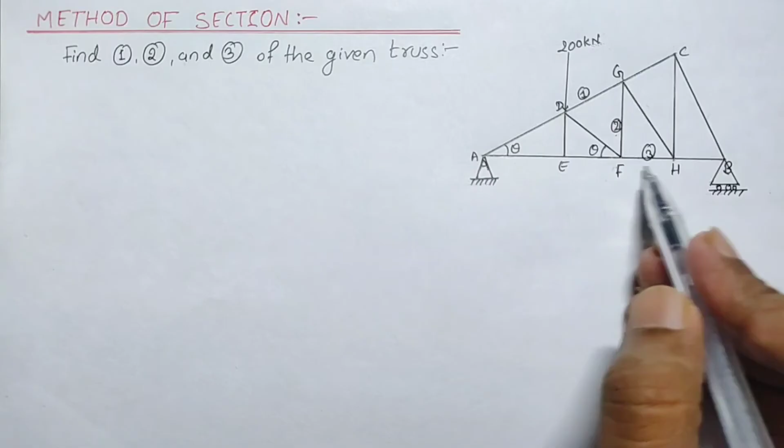We use method of section when some specific members of a truss are asked to find the forces in it. That means when the question is to find the forces in some specific members, not in all the members but some specific member, in that case we use the method of section.

There are some steps which we will be following to calculate the forces in these members DG, GF and FH. Before beginning the video, let us have a look at the steps which we will be following in this numerical.

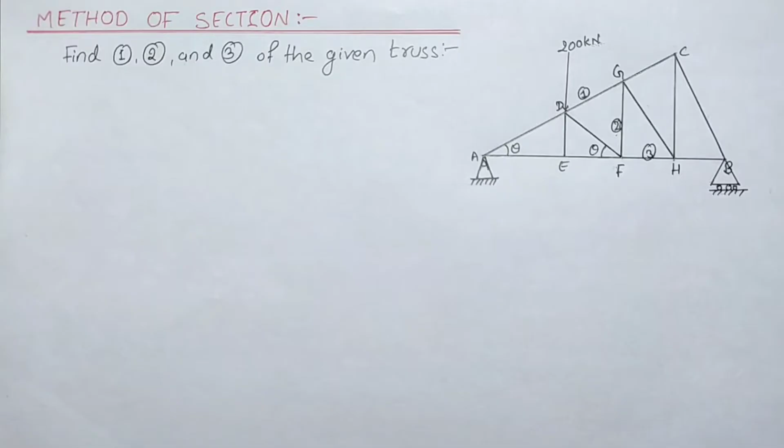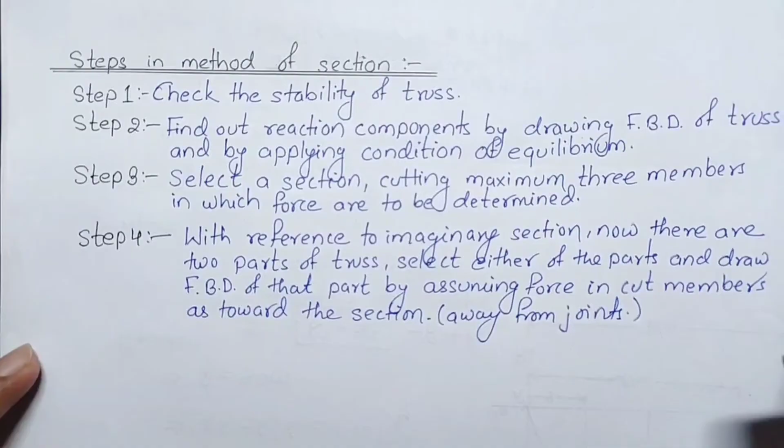So guys, here are the steps which I will be following in this numerical or in this video to calculate the unknown forces which we are asked.

Step 1 is check the stability of the truss. In step 1 I will be applying the condition for checking the stability of the given truss, that is m equals to 2j minus r.

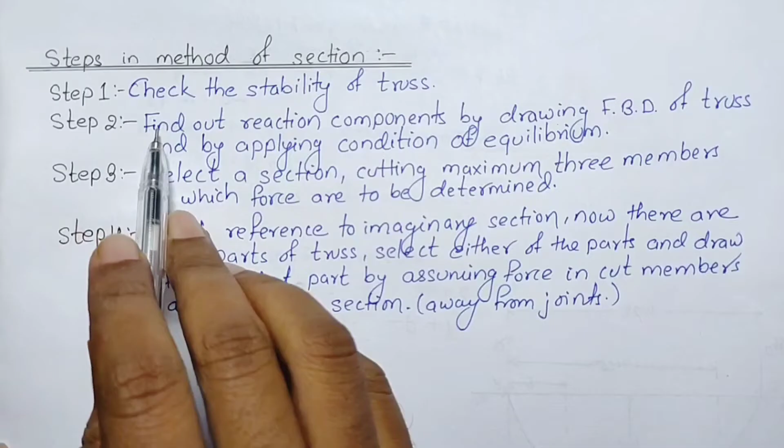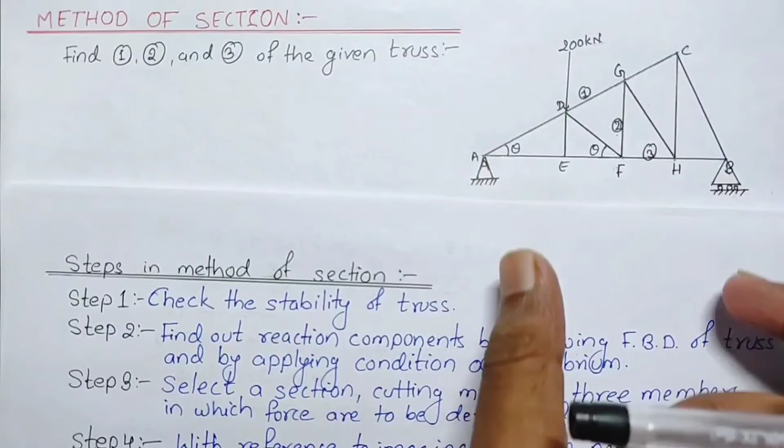Step 2 we need to find out the reaction component by drawing the free body diagram of the truss and by applying the condition of equilibrium. I will be drawing the free body diagram of this given truss below this, and then I will find the reaction components, that is calculating the reaction at support A and B in step 2.

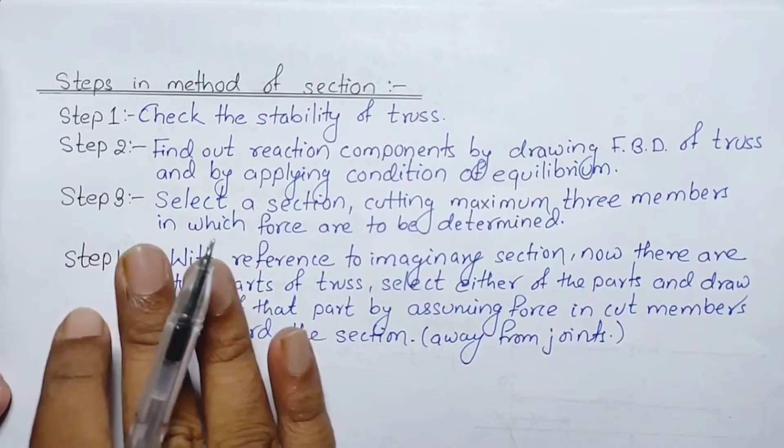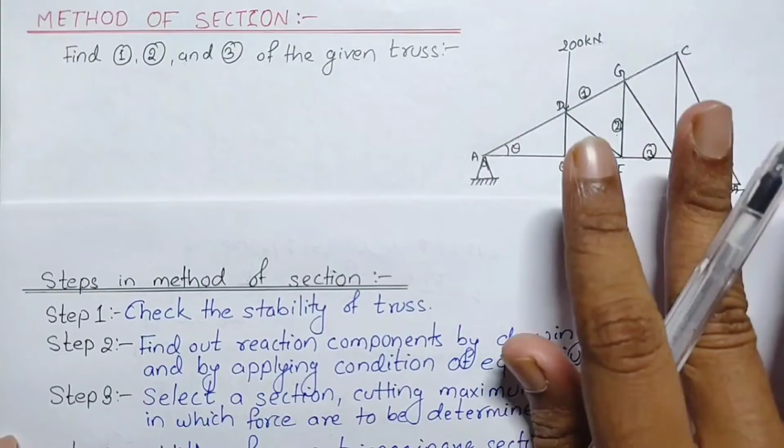In step 3 what we need to do is select a section cutting maximum 3 members in which forces are to be determined. It is saying that we need to split this whole truss into 2 sections, and the line which splits this truss into 2 portions should cut only a maximum of 3 members of the truss.

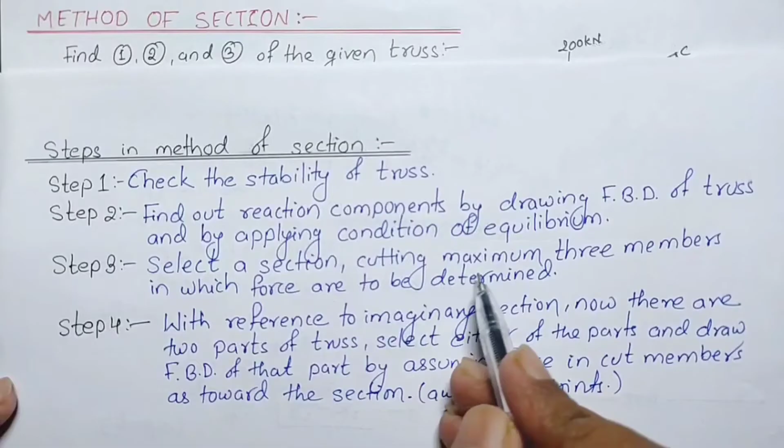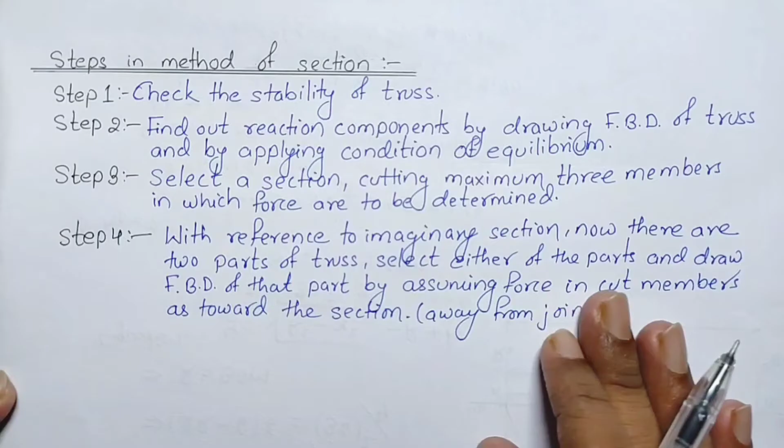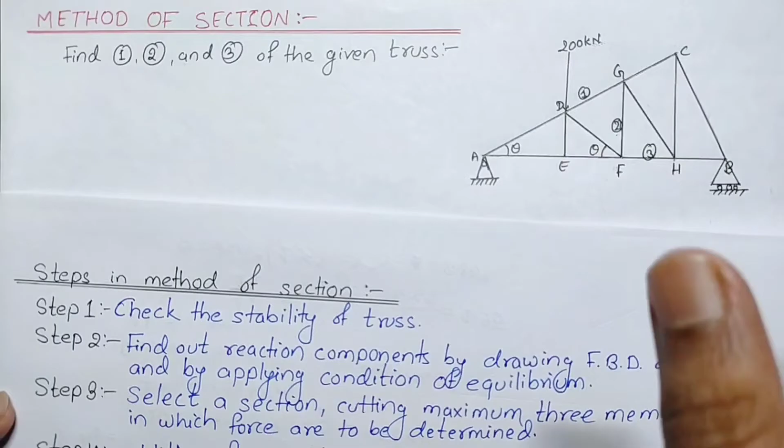Step 4 is, with reference to the imaginary section, there are now 2 parts of the truss. Select either of the parts and draw free body diagram of the part by assuming force in the cut members. After dividing the truss into 2 sections, we need to select either of the imaginary parts, because the truss is now divided into 2 parts, so we can use any of those 2 sections, and using that section we will be finding the unknown forces.

So guys, without any further delay, let's move toward step 1. Here is step 1, and in step 1 we will be checking the stability of the truss.

For checking the stability of the truss, we need to calculate the number of joints, number of reactions, as well as the number of members in this truss.

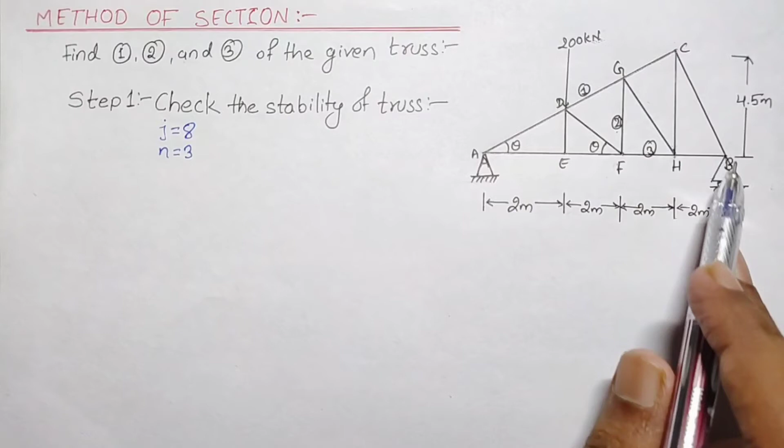Let us calculate the number of joints: 1, 2, 3, 4, 5, 6, 7, 8. So I have denoted the number of joints equals to j, and j is equal to 8.

Now we need to know the number of reactions. Suppose the support A here is our hinge support, and the number of reactions will be horizontal and vertical reaction, while moment is released here. Let us denote the reaction by R, and here the number of reactions is 2 due to the hinge support.

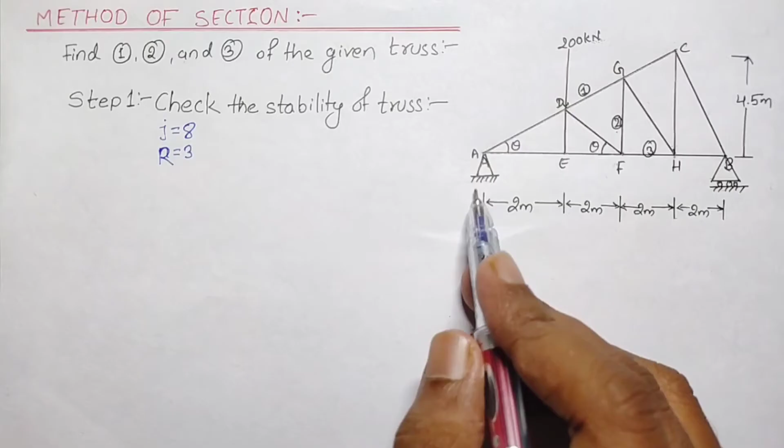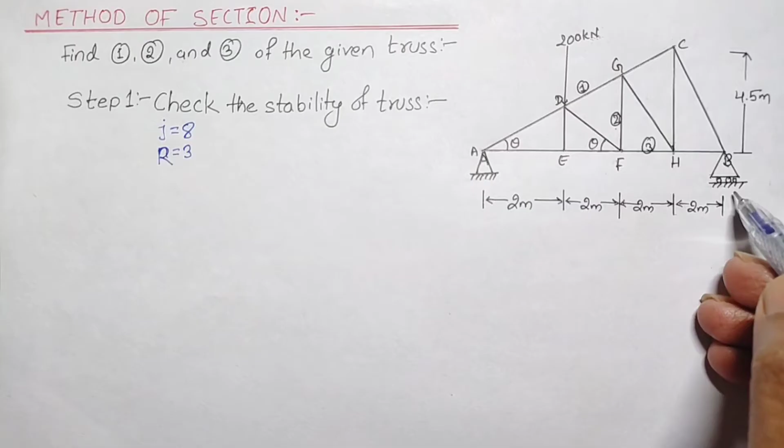Due to the roller support here we will have only 1 reaction, because the moment and the horizontal reaction, or horizontal force, is released. Here it will be carrying only vertical force, so the number of reactions will be equal to 3.

Let us note the number of members will be equal to n, and let us calculate the number of members of this truss. The members are 1, 2, 3, 4, 5, 6, 7, 8, 9, 10, 11, 12 and 13. So n will be equal to 13.

Now we have a condition, that is n equals to 2j minus r. If we put the value of j, which is equal to 8, minus reaction equal to 3, then we will have 16 minus 3 equals to 13, which is equal to n. So the truss is perfect.

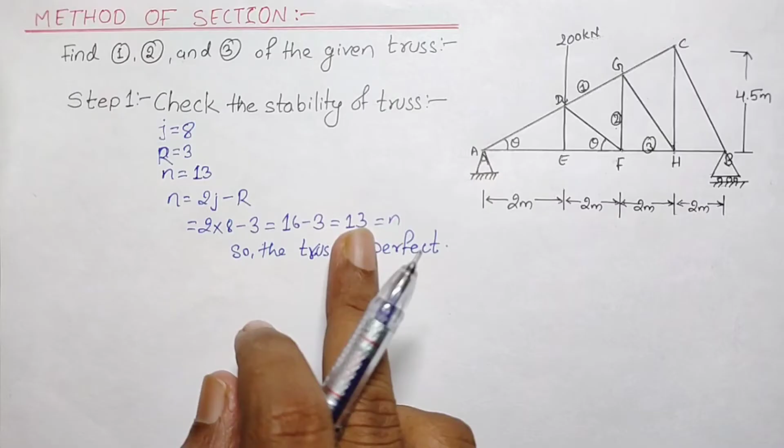So guys, we have calculated that 2j minus r is equal to 13, which is equal to our number of members. If this condition satisfies, it means our truss is a stable truss or perfect truss.

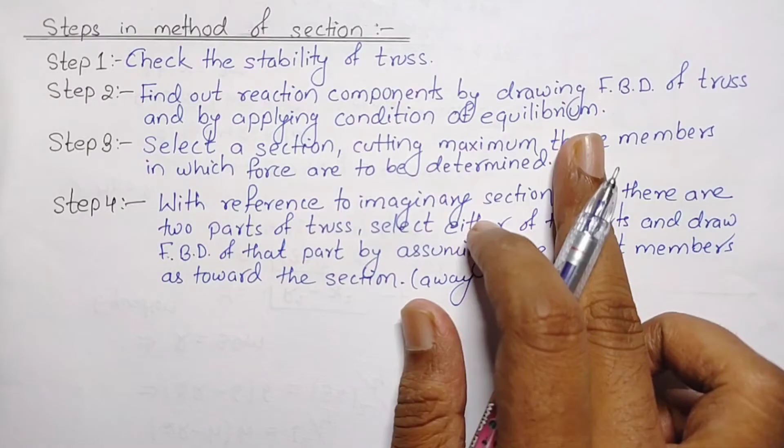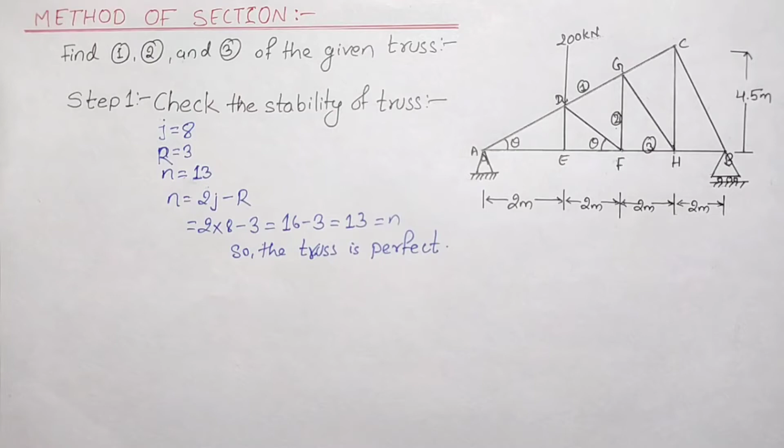Now the second step is to find out the reaction components by drawing the free body diagram of the truss and applying the condition of equilibrium. So in this step I will be calculating the reactions, but before that there are some unknowns which we need to calculate first.

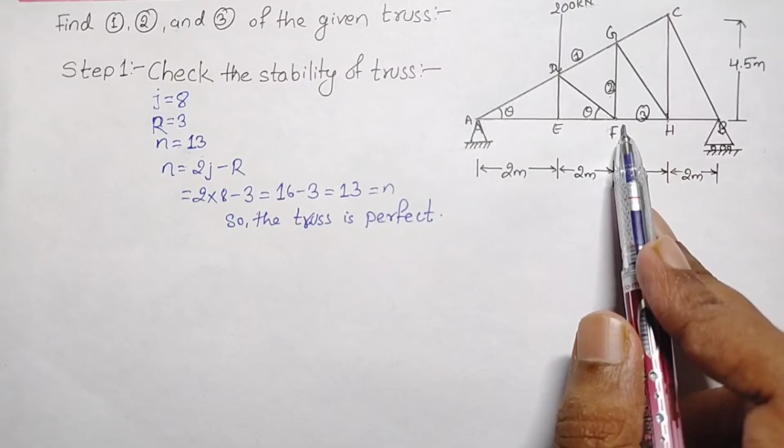Let us find out the unknowns first, and the unknowns are theta. We need to calculate the value of theta, and we will be needing the value of span GF. We have the value of span CH equal to 4.5, and we don't know the value of span GF, because it will be helpful while calculating the moment related to different points while calculating the final forces. So let us find those unknowns first.

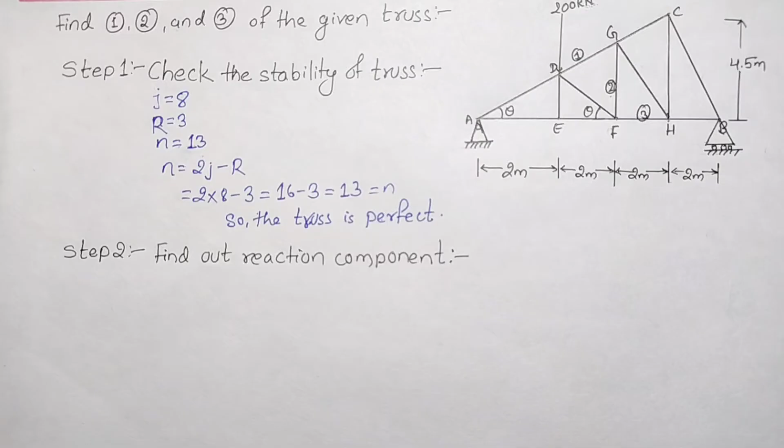So guys, here is step 2 in which we will be calculating the reaction component, and before that let us find the unknowns, that is span of GF and theta. First let us find the unknown span of CH.

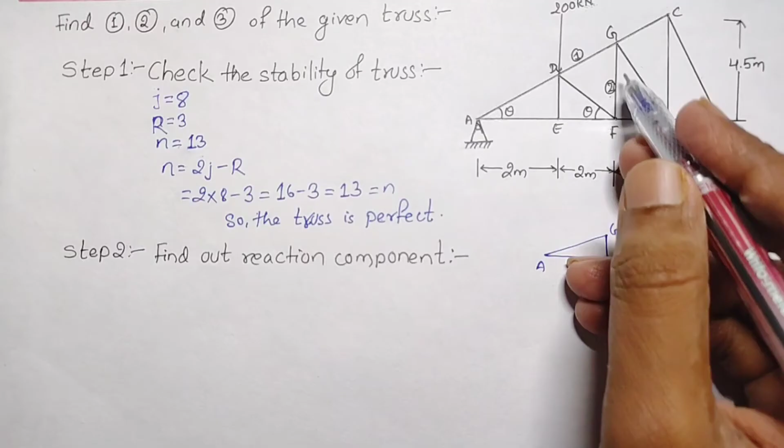Let us draw a triangle AFG and this big triangle AHC. Now guys, in triangle AFG we have the span from A to F equal to 4 meter, and span of AH is 2 plus 2 plus 2, meaning 6 meter, and we are calculating the value of FG, which is unknown, while we know the value of CH which is equal to 4.5 meter.

It says that the corresponding sides of similar triangles are proportional. So if I take X, Y, and the corresponding side of this triangle, side FG is proportional to CH, so X upon 4.5 will be equal to 4 by 6.

What I did here is just apply the condition of similar triangles, which says the sides of similar triangles are proportional, meaning X is proportional to 4.5, and 4 is proportional to 6. Now from here we can calculate X equals to 4 times 4.5 divided by 6 — just cross multiplication — and on solving this we get the value of X equal to 3 meter.

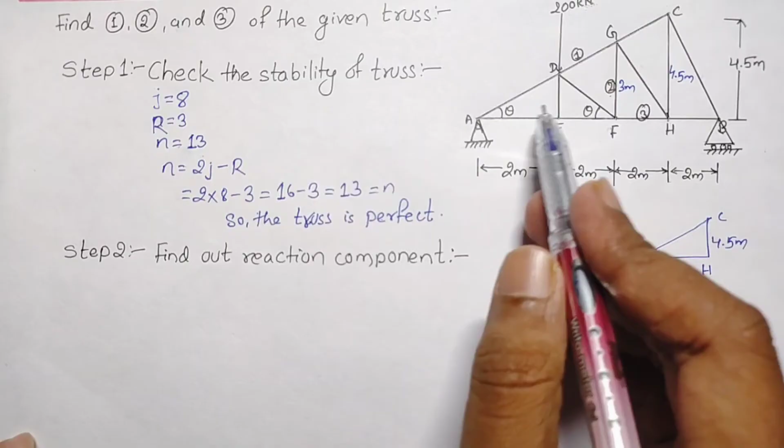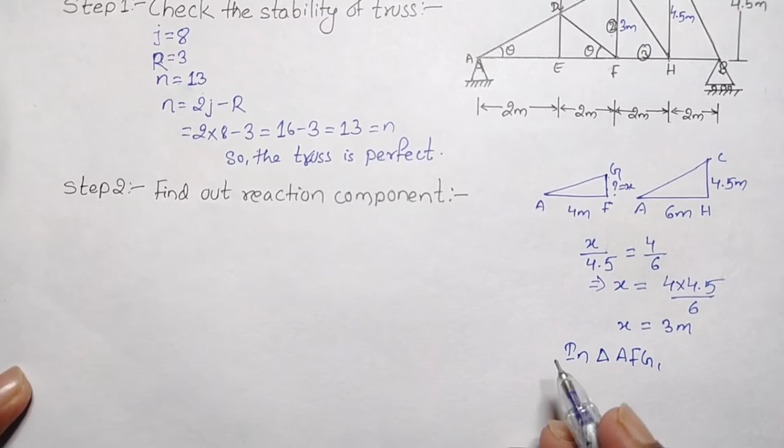Now guys, how can we calculate theta? If I consider triangle AFG, then what we can write in triangle AFG is tan theta equals to perpendicular by base, which will be equal to GF by AF. From here we have the value of GF equal to 3, and AF equal to 4.

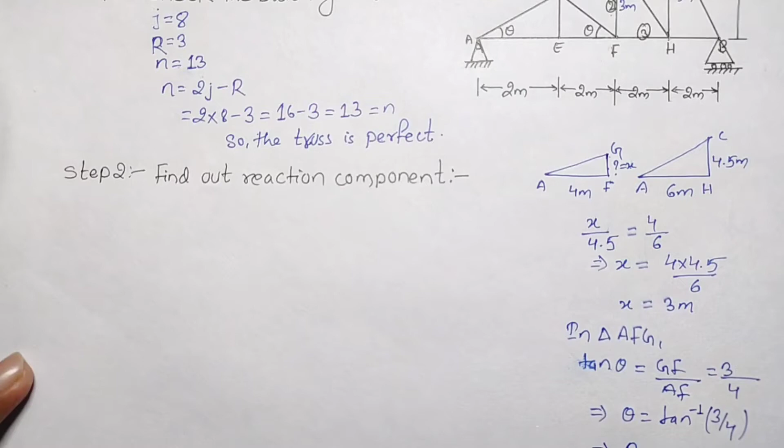So theta will be equal to tan inverse of 3 by 4. From here we get the value of theta equal to 36.87 degrees.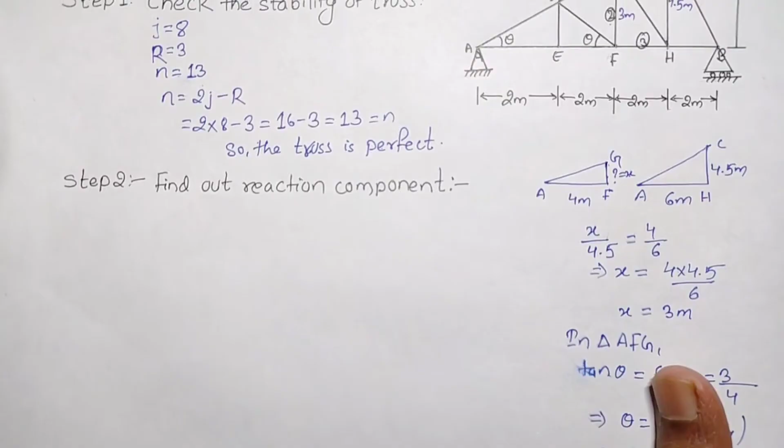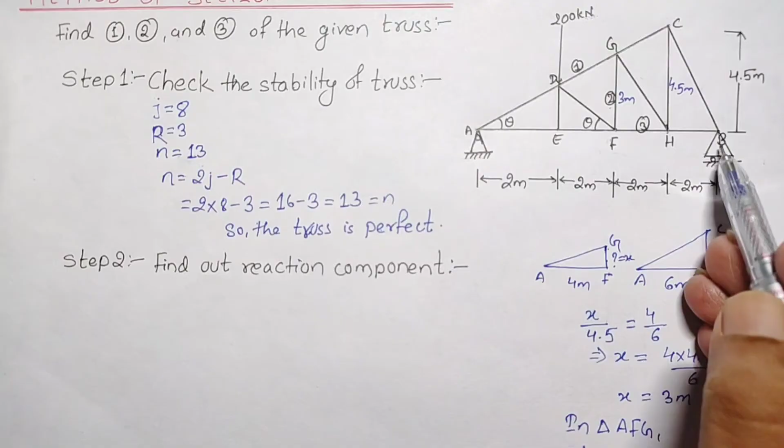Now let us draw the free body diagram of this structure. While drawing the free body diagram, what we need to do is simply represent this hinge support as well as this roller support as a simply supported beam.

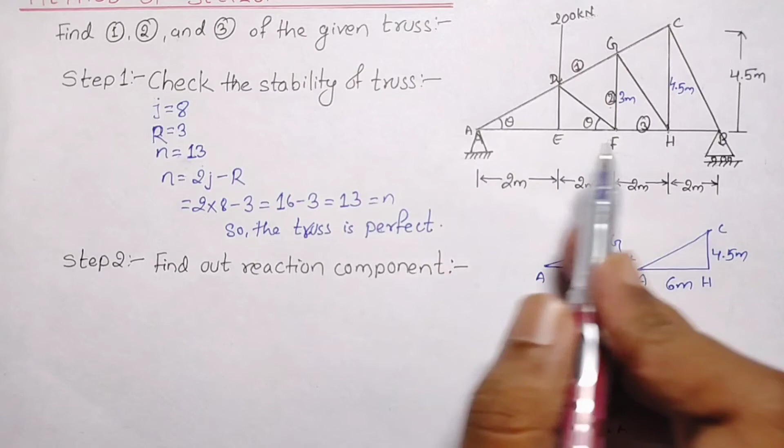We will redraw this truss as a simply supported beam to calculate the reactions at support A and B. So let us draw that.

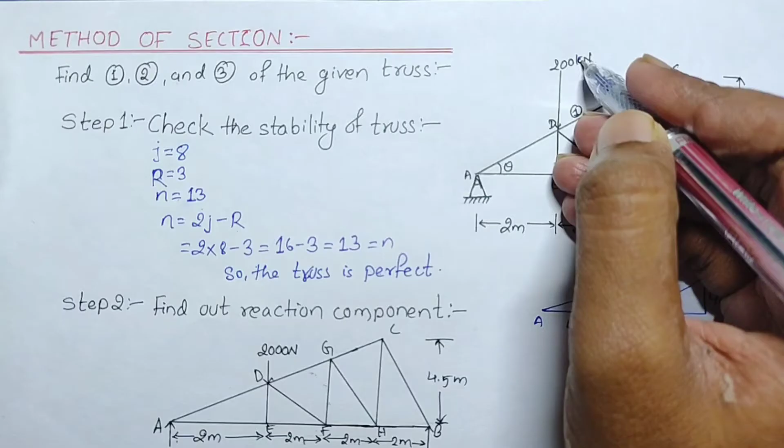Here I have drawn the free body diagram. Here I have mistakenly written this load as 200 kilonewton, but this is actually 2000 Newton. Sorry for this. Now let us calculate the reaction at A and B.

Let the reaction at A be RA and reaction at B be RB, and taking moment about A, we will have...

RB times 8 meter, this is anti-clockwise. It will be equal to the clockwise moment, that is 2000 Newton times 2. Calculating this, we will have RB equals to...

500 Newton. Now, after calculating the reaction at B, we can also calculate the reaction at A, but that is going to be of no use, because if I take a section dividing this portion, it divides all our unknowns, 3 unknowns. One thing to remember: whenever we divide the truss into two sections, the section lines should pass in such a way that it crosses all the unknowns.

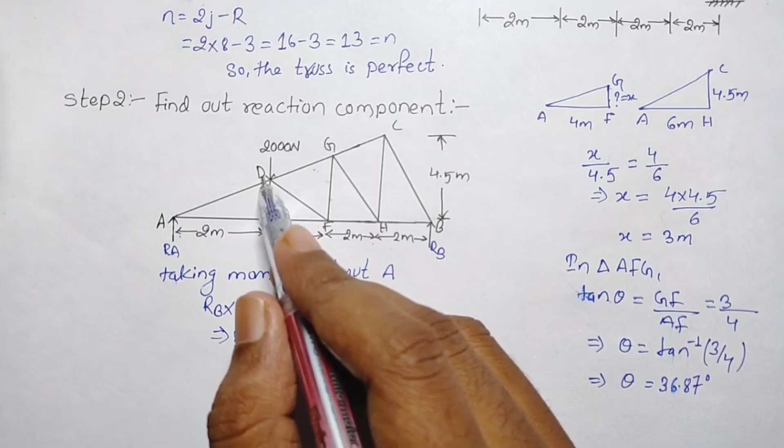If I draw a section line from here, it is crossing all the unknowns, that is DG, FG, and FH. I will cover this portion of the truss and use this other portion to find the unknowns. So there is no need to calculate the reaction at A, that would just be time consuming.

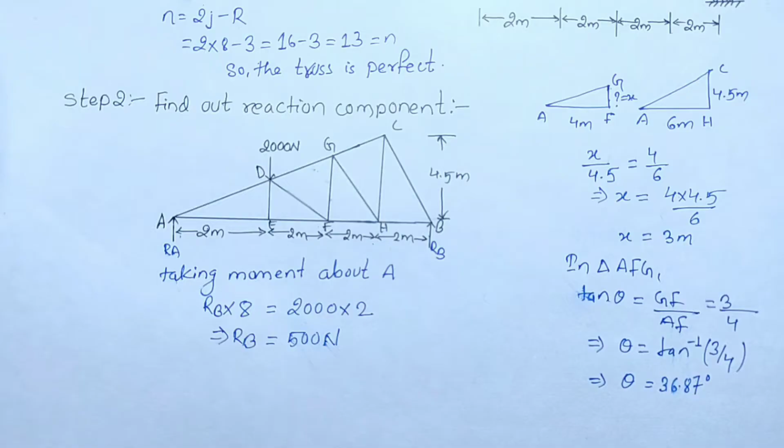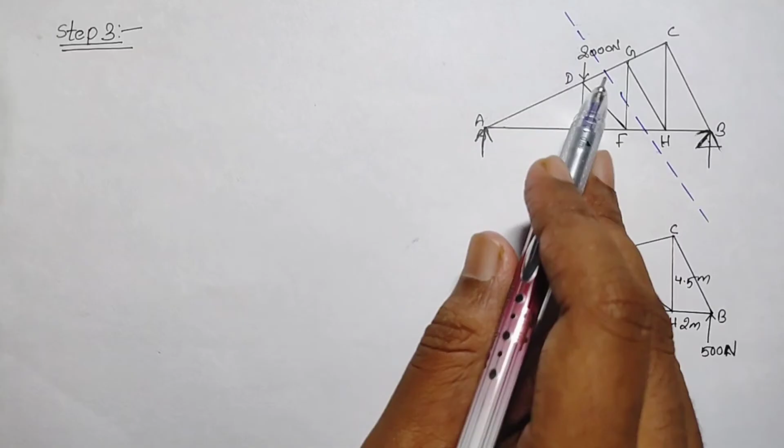Now let us move toward step 3. Here is step 3, and what I have done is recopy the free body diagram of the previous truss, then drawn a section which splits DG, which was carrying force 1, and GF, which was carrying force 2, and FH, which was carrying force 3, into two portions. I am considering this right hand portion for finding the unknown forces.

One more thing we need to do is draw the forces away from the joints. This is our force 1 moving away from joint G, and this is force 2 moving away from joint G, and similarly all the forces are moving away from the joints.

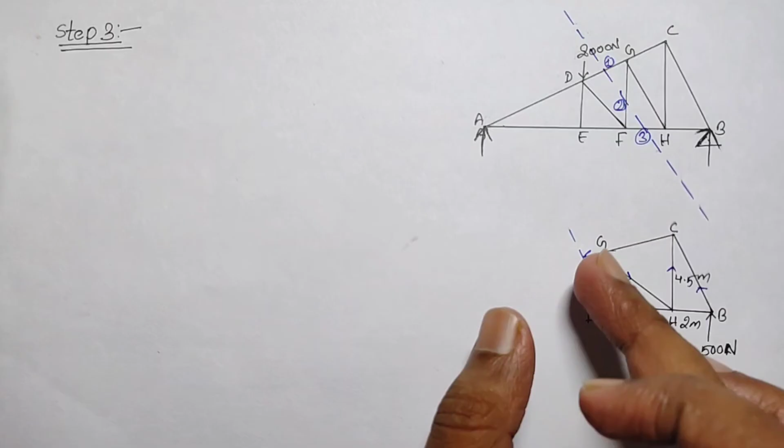In the method of sections, what we need to do is apply the moment taking different points, and we need to select a point in such a way that about which we are calculating the moment, two of the unknown forces must be zero at that point, so that we will have only one unknown, and we can easily calculate it using the equation.

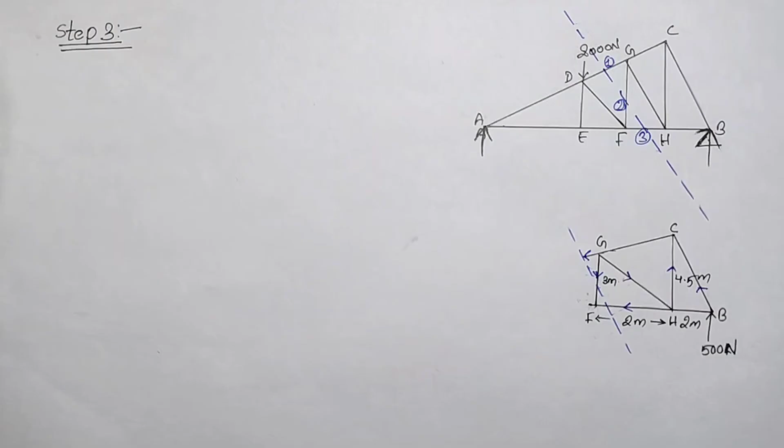Let me do that step, and it will be more clear if I solve this here. I will make you clear through this solution. Now see here guys, it will be more clear from this step.

Suppose I am taking moment about G, then we have 3 unknowns, that is force 1, force 2, force 3. If I take moment about G, force 1 and force 2 both intersect at this point, so these 2 forces will be zero, and force 3 is away from this point because this force will never intersect at point G. So we can take point G, because the two forces are zero, and here we have only one unknown, and from the moment equation we will have only one equation, so we can easily calculate force 3.

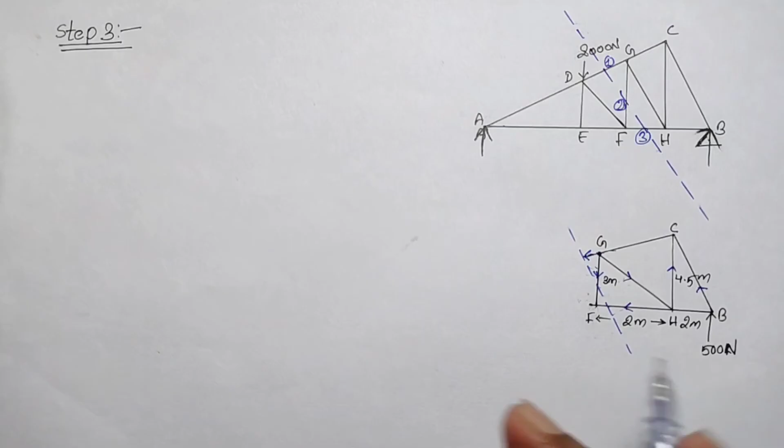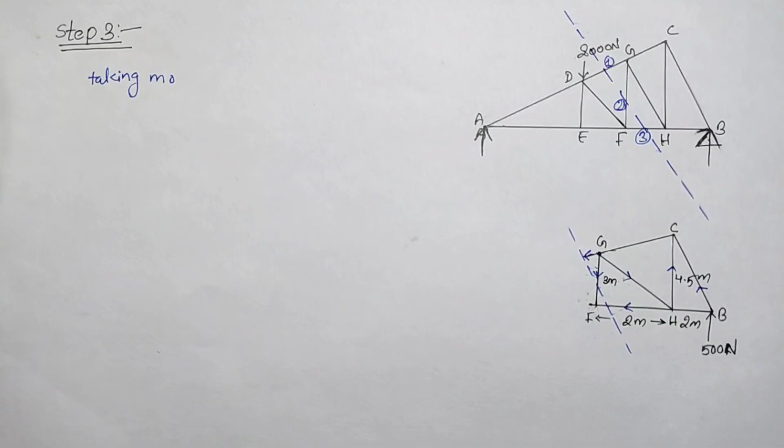So let us write it down here. Taking moment about G. If I take moment about G, our reaction RB is taking anti-clockwise direction, so it will be RB, and the distance of reaction B from this point G will be 4 meter.

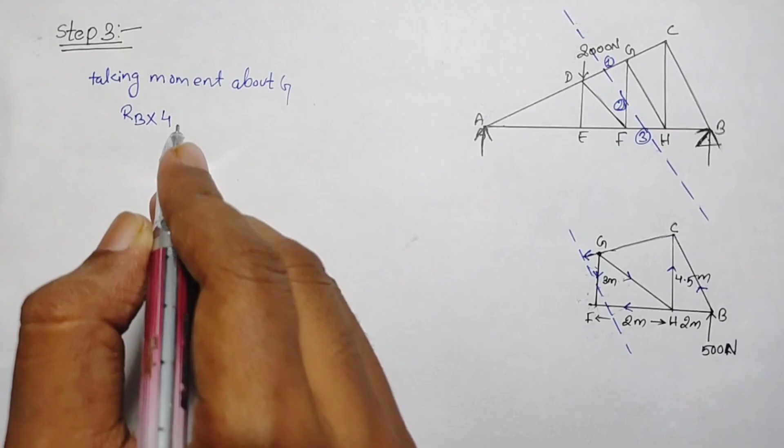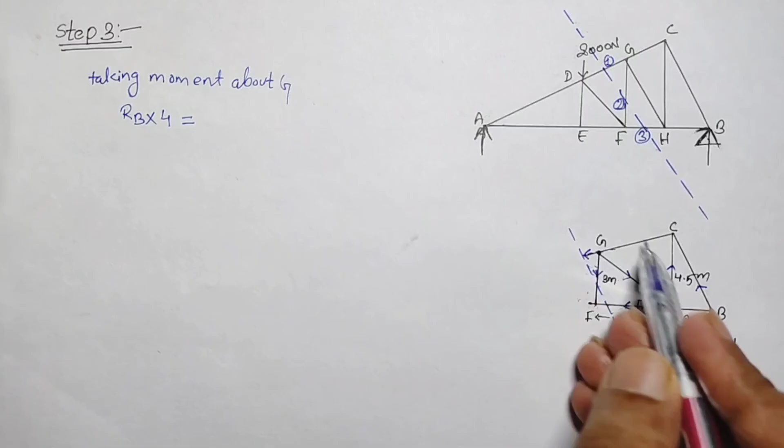Force times perpendicular distance will equal 4 meters, and this is our force F3, which is taking clockwise direction about point G. So F3 times the span of this force times perpendicular distance about point G, where the perpendicular distance is 3. So from here, if I put the value of Rb equals to 500 times 4 divided by 3, equals F3, we get the value of force 3, which equals 666.67 Newton. I hope you understood this step.

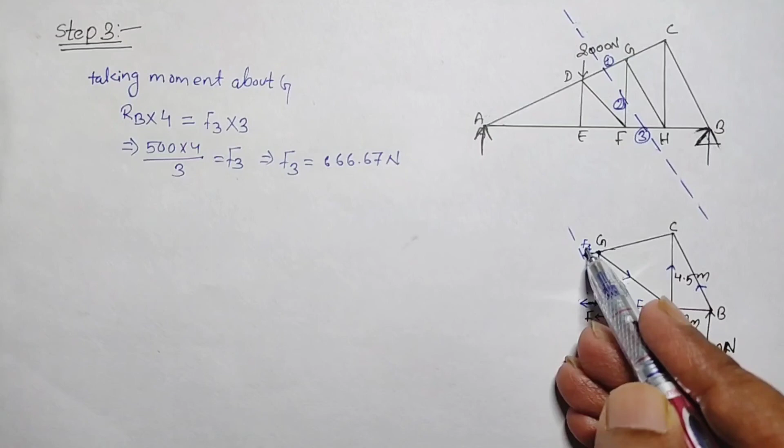Now let us move toward finding another unknown, which is F1. For finding F1, let us take moment about point F. If I take moment about point F, then F3 and F2 will intersect at point F, meaning these two forces will be zero while taking the moment about F. So from here we can easily find F1, because these two unknowns equal zero while taking moment about F, and we will have one equation and one unknown.

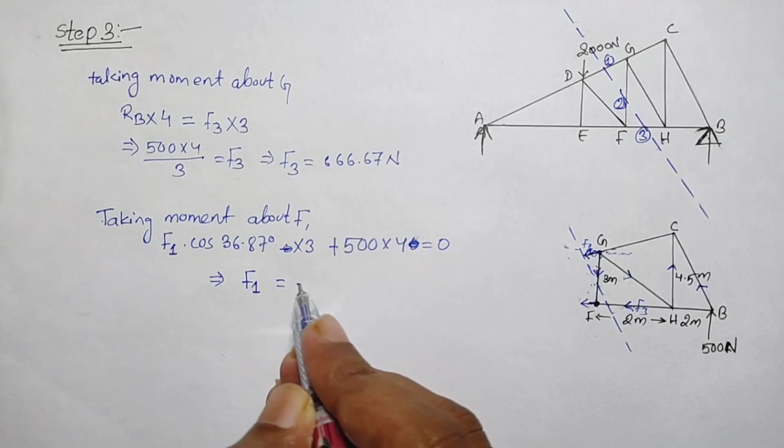Taking moment about F, what we need to do is take force times perpendicular distance, and the force is acting at some angle theta, which we have already calculated. So on resolving this parallel to the base, so that this span will be perpendicular to this force, we will have F1 times cos theta, with theta equal to 36.87 degrees, multiplied by the span of 3 meters, plus this is taking anti-clockwise direction, and 500 is also taking anti-clockwise direction, so it will equal 500 times 4, which equals 0. From here we get the value of F1 equals minus 833.33 Newton. So now we have calculated the value of F3 and F1.

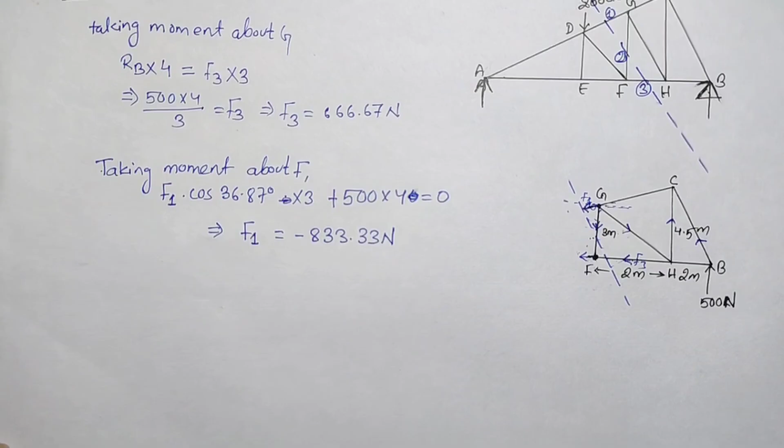Now it's time to calculate the value of F2. While calculating F2, if I take moment about support B, our F3 will intersect at B, so F3 will be zero, meaning we can use the value of F2 and F1, because F1 is not intersecting at B. So F2 is unknown, and F2 force times perpendicular distance -- this F2 is moving anti-clockwise, and F1 will also be moving anti-clockwise, so the sum of these two forces will equal zero.

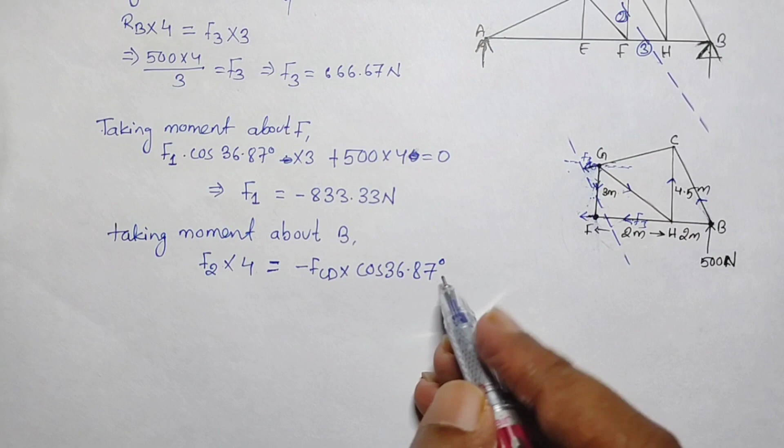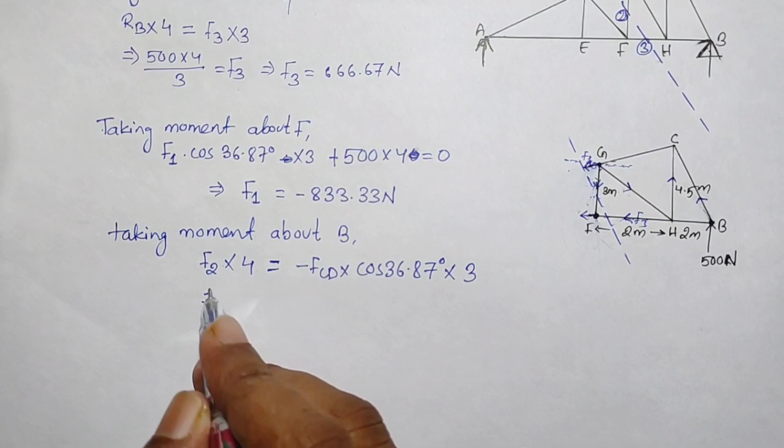So I can write F2 times 4, which equals minus FCD times cos 36.87 degrees. I have taken this resolved force because it is acting at some angle, so I need to take it parallel to the base: FCD cos 36.87 times span. This force is acting at 3 meters, because force times perpendicular distance is 3 meters, so multiply this by 3 meters. From here we get the value of F2 equals 500 Newton.

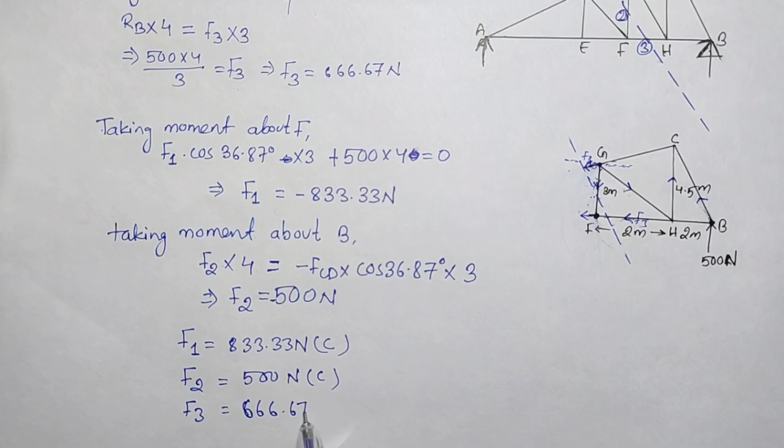Now we have calculated the value F1 equals 833.33 Newton, which is compressive. Similarly, F2 equals 500 Newton, and it is also compressive. And F3 equals 666.67 Newton, which is our tensile force.